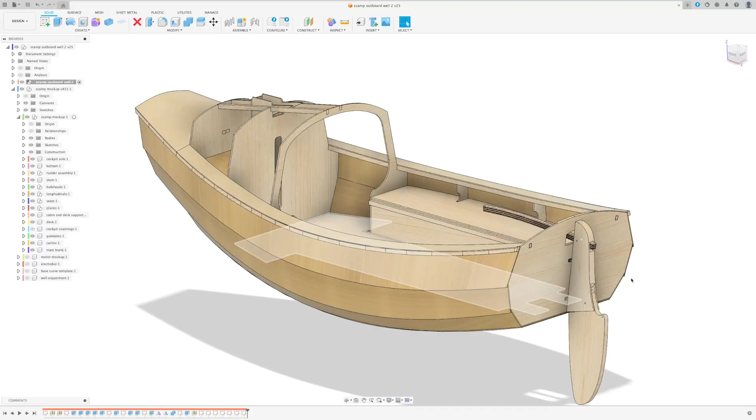The rudder even moves at the joint, and the tiller goes up and down. I think I spent far too long doing that, but hey, I have this mock-up of the SCAMP, maybe I can use it for other things. I haven't quite finished it, I got up to the mast trunk and thought, you crazy, what are you doing?

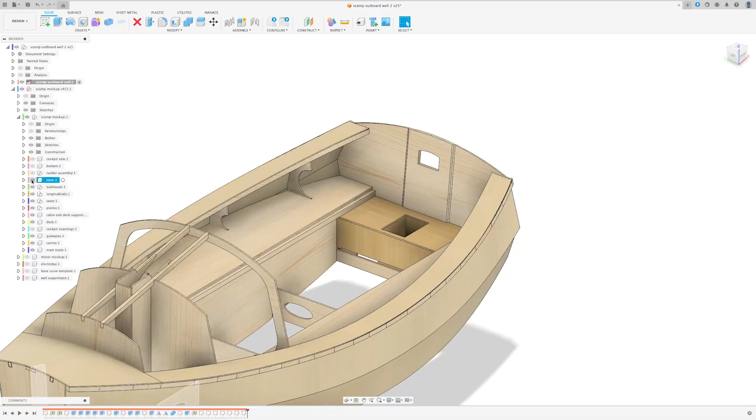Anyway, here's the part we're concerned about. Here at the back we have the outboard well assembly as I've designed it, and I can just remove a bunch of things here so we can see what it looks like.

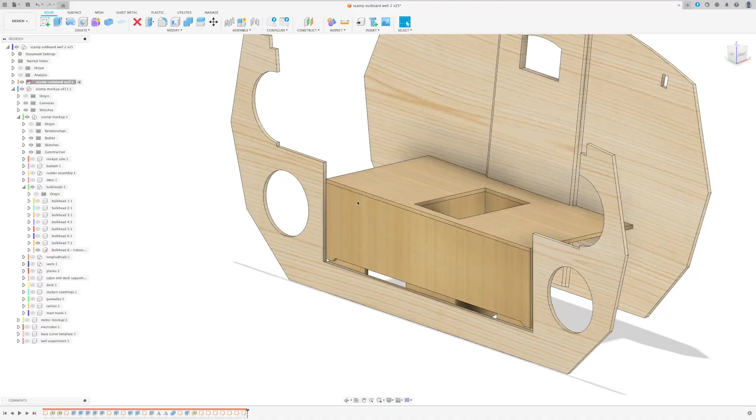So it's pretty basic, there's just this sort of tube here, and this goes all the way through down to the water. Here you can see how it fits in with the bulkhead. I made it match up with bulkhead 7 here. I wanted that strength, I suppose, and I wanted it to be as small as possible so it didn't take up too much space in the boat, but it still needed to clear everything else.

It goes through the cockpit sole, and when it hits the bottom you can see that these walls here are sitting on top of the bottom here. It's actually bearing down on the bottom surface, and I think that should make it stronger.

The hole in the cockpit sole is 9mm larger all around than the hole in the bottom. I wanted to make this hole as small as possible while still fitting the outboard through. It's 160 by 220, I believe.

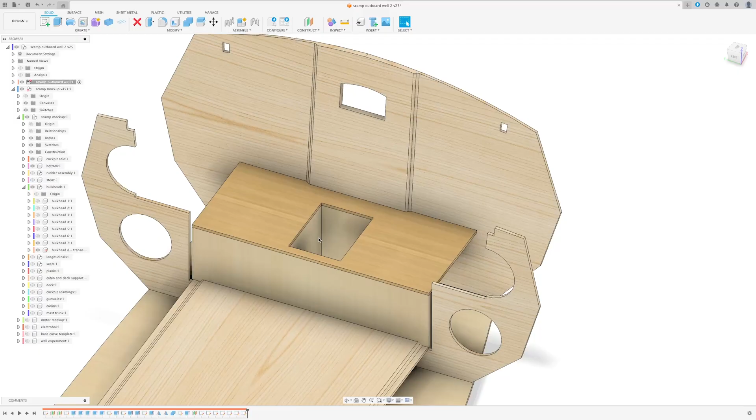The outboard clamps onto this part here. For strength, that's 3 layers.

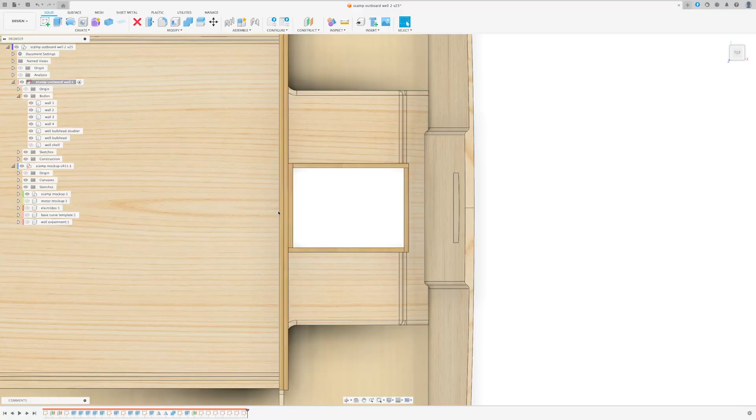I have this here, which essentially extends bulkhead 7 here. And you can see all these are single 9mm sheet, except here at the front there's actually 3 layers, 27mm in total. So we have this front piece, which is just a normal part of the well tunnel, I guess. And then we have this piece at the front, which is an extension of bulkhead 7. And then we have this piece, which is essentially doubling bulkhead 7 all the way along.

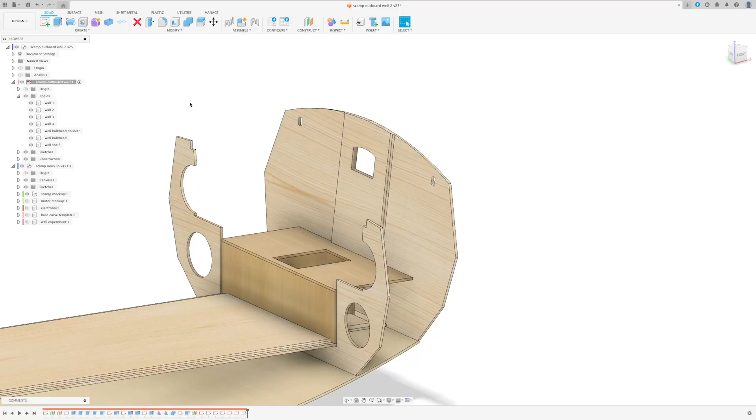I wanted to make sure that we had enough rigidity and strength here so that the motor didn't cause any undue stress on anything. So we should have a nice chunky bit here to grip upon, and the top just caps it all off. The reason I did this whole mock-up was because I wanted to make sure that the motor would fit in and wouldn't hit anything.

So I found this picture of the outboard motor from the manual, and I've scaled it through measurements that I took from the motor, so it should be pretty spot on. This picture is attached to a Fusion canvas, so we can pan around and see how it fits here. It is sticking a fair amount down in the water.

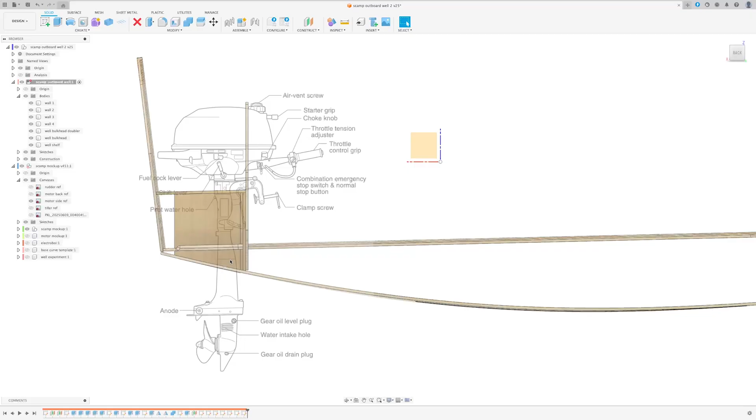I would have liked it to be a little bit further up, but that is the reason why I mocked everything up. So you can see here, if we re-enable the rudder assembly, the tiller here is really a constraint. The tiller needs to come over the top of the motor, so this has to be down as far as possible, but still want it to be as high as possible because the water line is here, more or less.

I want as much vertical space between the top of the outboard well and the water line as possible, just so water doesn't potentially come in if the boat is in heavy seas. But of course, everything still had to be low enough so that the tiller didn't hit the top of the motor. And so this is the compromise that I came up with.

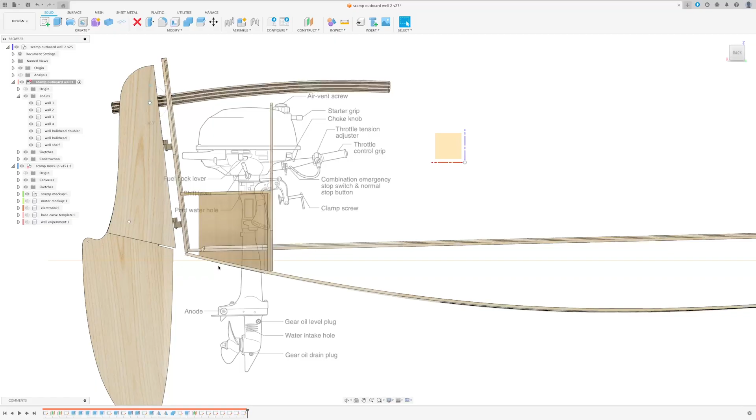It's a convenient height because the top of the outboard well assembly here comes right up under these thwart supports that I have, so we can get a really strong connection here when gluing it up. I could have raised it slightly higher, but then I would have had to either put a notch in here or not have this top bit going all the way to the edge.

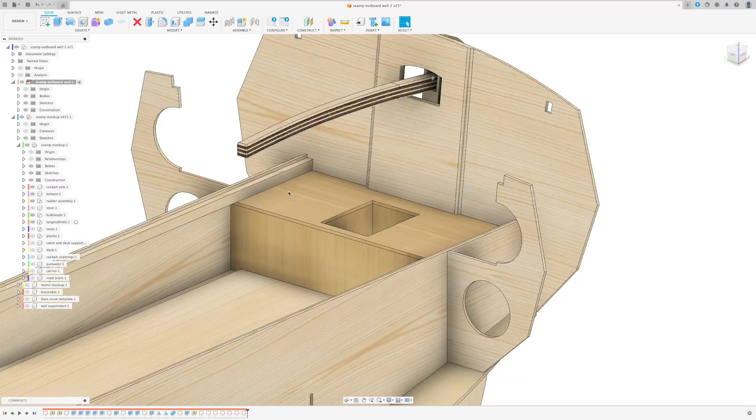And I feel like it just would have been weaker. Now what I haven't got in this design right now is that I will be cutting a hole here and a hole here for some inspection ports, because there's just a bunch of space in here which would otherwise just be empty, so I can use them for storage of stuff related to the motor.

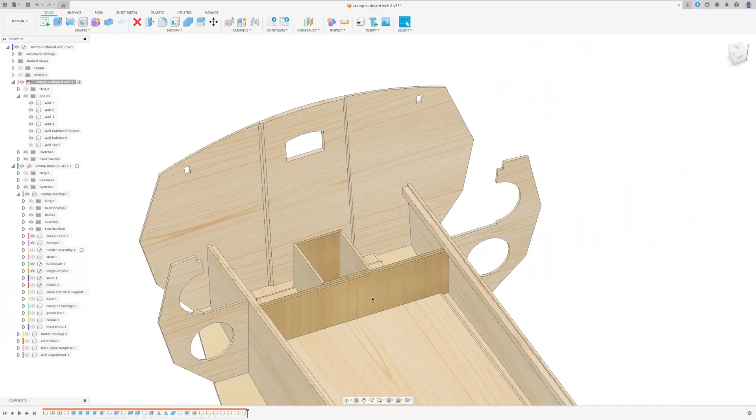So that's the design, and I think it will work. Either way, I've got this lovely mock-up here. I haven't modeled all the cleats that I will have to glue all this stuff.

So there'll be a cleat running along here, here, and probably one along here, and there'll be a cleat along here, and the same on the other side, so that when I put the top on, it will just sort of glue straight down. And when I glue up the rest of it, I can just do fillets like standard.

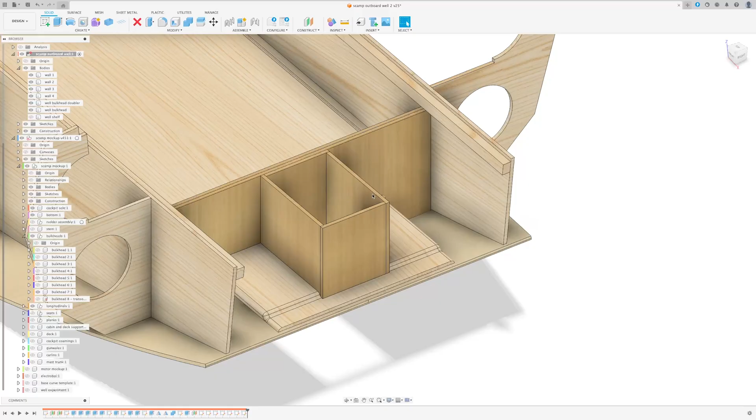Chuck on there, there, around here, etc. And I'll also wrap this thing in fiberglass on the outside and the inside, especially this bit in here. Is that the inside or is it the outside? It's the bit on the outside world, but I guess it's the inside of the tunnel because this will be exposed to the ocean and water, etc.

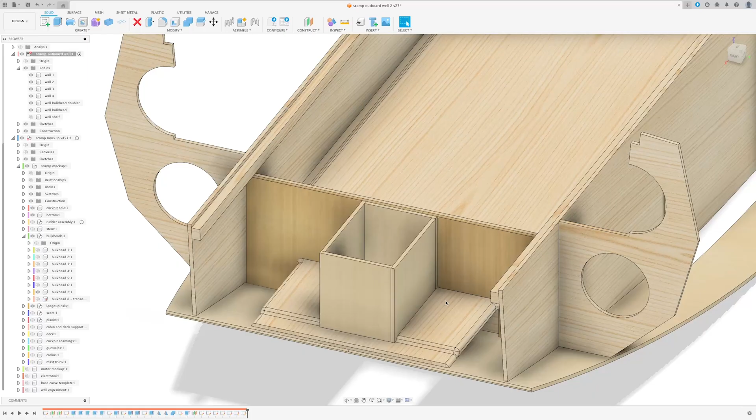I've decided not to do anything about these scuppers that I made, I'll just leave them as they were, and there'll be a slight dip here, so whatevs. And if you remember, I actually had two little holes here and one here for some little cockpit drains, which didn't really work well, so I covered them up. I will just remove those blank-outs and then fill those in with wood and epoxy, just so they're all gone.

So yeah, that's how she's gonna all look. Now I just have to do all the rest of the things.